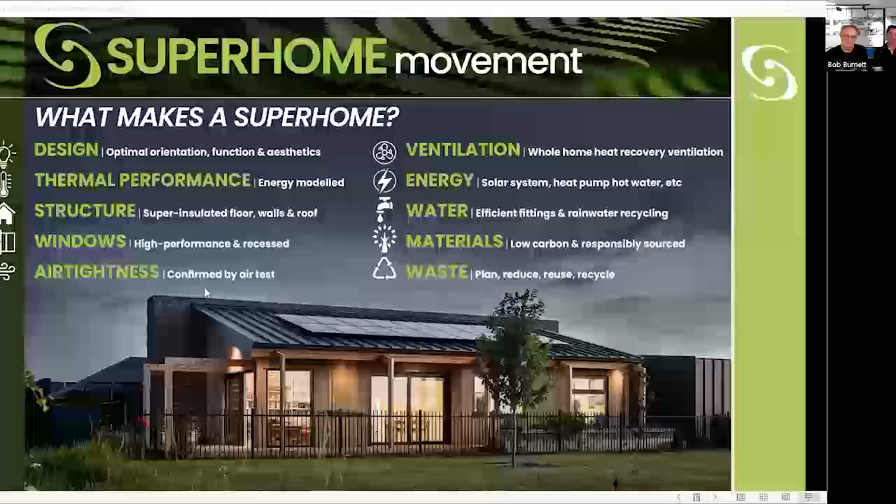Leading off from exactly what you said, I couldn't agree more that early consultant and contractor involvement is absolutely key, particularly to engineer a lot of the steel out. It obviously has its place—sometimes you need portal frames or a beam—but keeping it within the thermal envelope to reduce cold bridging as much as possible, and that's where those early meetings really help.

And just designing with as much timber as possible to reduce that thermal bridging as well. As a lot of engineers and even architects would know now, ProLam portal frames are really good. Your typical living, dining, lounge area with big wings, and at the end you typically have glass with no wing walls for bracing—that's always where 9 times out of 10 you'd see structural steel portal frames, but you can do that with timber now.

Really good to work with those guys too, as we've done on a couple of projects. I think too, for this early engagement, we've been utilising it a little bit lately on the more technical jobs where we're using BIM modelling.

So we can basically build it in virtually before we build it in reality, which we've used for offsite design. That helps out, and it can iron out a lot of issues at the front end, which means you don't waste time on site fixing things up.

So almost like doing shop drawings, I guess. Pretty much, yeah. And likewise, we're doing 3D modelling and sharing our IFC files with the architects at that QS stage as well—irons a lot of that out.

So these are our partners on the screen at the moment in the Superhome movement, and there's I think 3 or 4 engineers, structural engineers, who are Superhome participants. There's probably about 20 or so builders, and probably about the same number of designers.

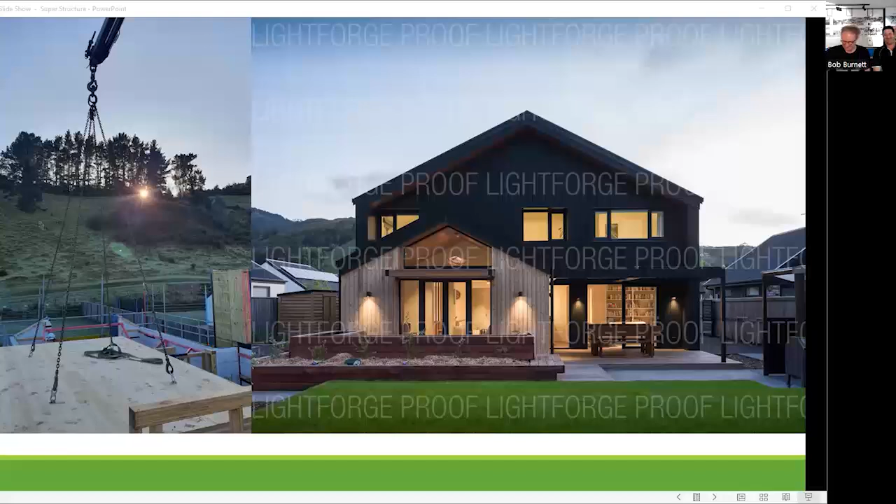So basically you can get away with a floor that's 160 instead of 300. You get that extra height. And the good thing about that too is the speed of it going down, so we weren't cutting every joist and laying them down. Of course, you can utilise that with a conventional joist system and make cassettes and lift them in.

But for this case, for that recession plane, we got that mid-floor down in about 3 hours. And then you didn't have to worry about coming back in and having services penetrations through joists and the like, as that was already done. So we had a service cavity underneath to allow for the ventilation in the ceiling space.

So this project here is a really good example of extensive use of, or minimal, steel. I think there's only one piece of steel in here, if you can see my mouse, it's just this window. And all of these large overhang roofs, and there's a cantilever at the other end of this building, it's all done with timber and sort of box beams with plywood on two sides.

There's the entrance there, so the top floor cantilevers over the bottom floor and creates a bit of a sheltered entranceway. Dan made the Ecopanels for this and installed them, and there was a different builder that did the rest of the job. But we'll talk about Ecopanels in a minute.

But this drawing here just shows how we incorporated the steel so that it's within the thermal envelope, within the airtight thermal envelope. So if you do need steel, it's pretty much essential to not put it in the structural part of the wall that we want to be airtight and insulated. So what would normally be the services cavity, a 45mm cavity, we just thickened that up to 90mm on this one wall, and that's where the structural steel was in that wall.

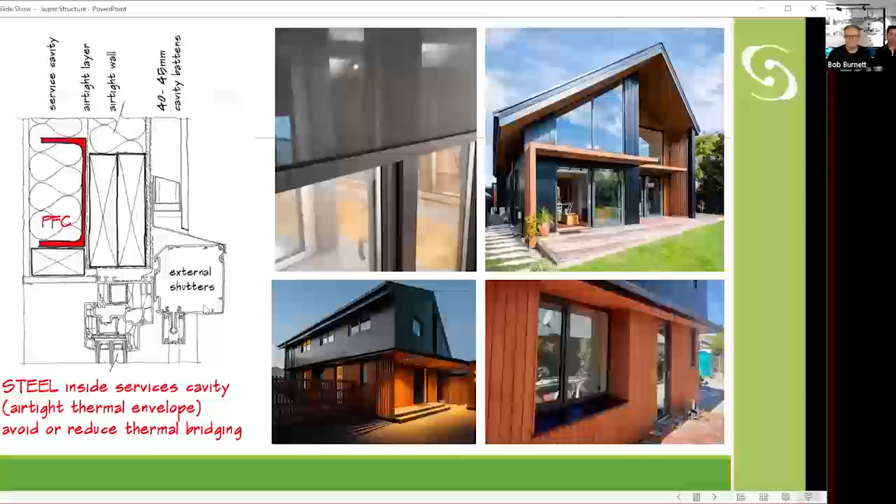But yeah, there's always a way to eliminate the thermal bridging, and it just takes thought, and the desire to do better. Like what we were talking about before, just understanding why we need to do this, and good collaboration and teamwork between all parties as well.

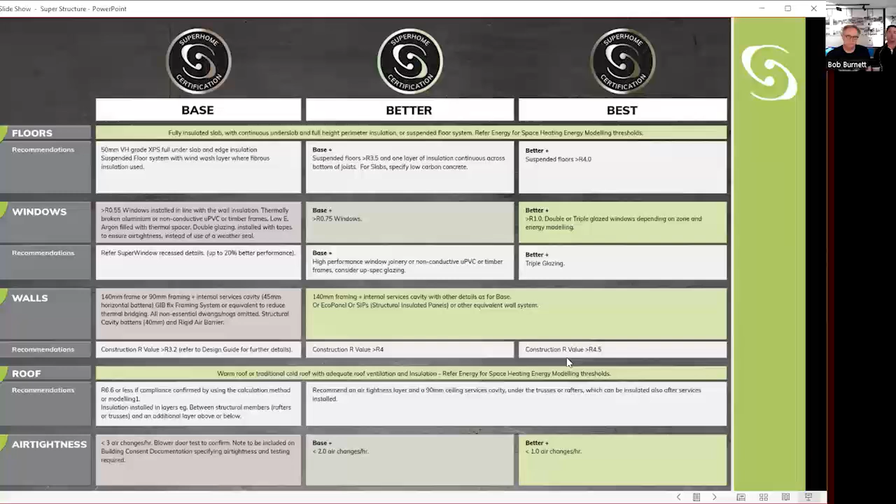So base, better, best. Maybe we need a base, better, best for structural, a superstructure. Do you want to have a think about that for us, Steve?

So you start with steel and work your way up, or maybe it relates to what we were talking about before, or 100% there and then working your way up. Yeah, and how you can achieve that.

I've worked with a lot of different engineers, and some engineers prefer steel, some prefer timber, some prefer concrete. We're definitely trying to reduce the steel both from the thermal bridging point of view, but also from the embodied carbon point of view as well.

So we're doing a project up in Kitchener's Knoll, which is in Redmund Spur, which is exactly that. It's a client system. So they've come up with a system where it's got a plywood shuttering on the inside, concrete, and then EPS on the outside, which all ties in together.

And we've poured these in situ, and so it's just got about 150 mils of insulation on the outside, which then incorporates battens within the system to be able to hold the form in place while it's being poured, but then attach the cladding to.

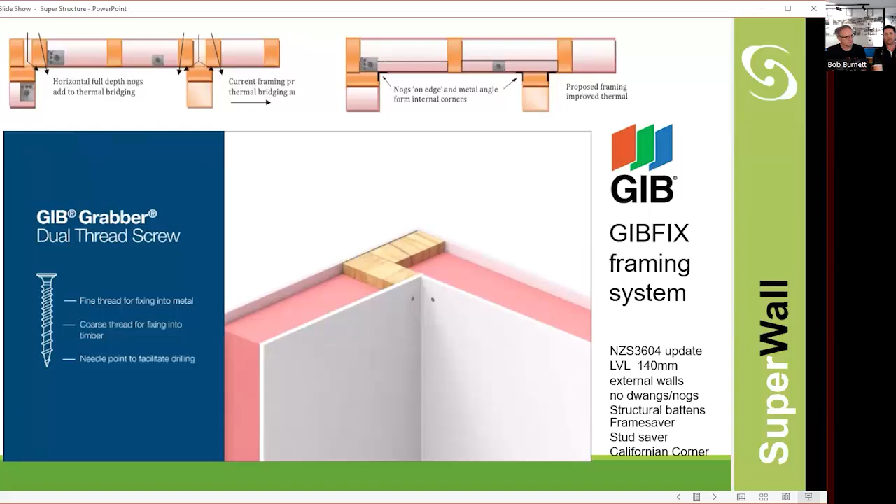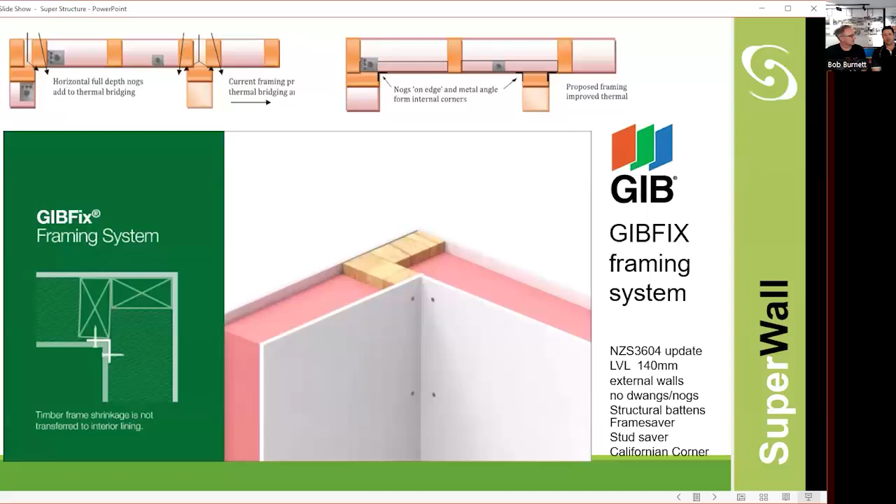And I thought, well, if there's less timber and more insulation, and the insulation's cheaper than timber, then why aren't all houses built this way? We've just carried on doing it the old way. I guess one of the most used sayings around is it's how we've always done it, so therefore it should be right, which is not the case. You should be able to adapt and move and just do things better each time.

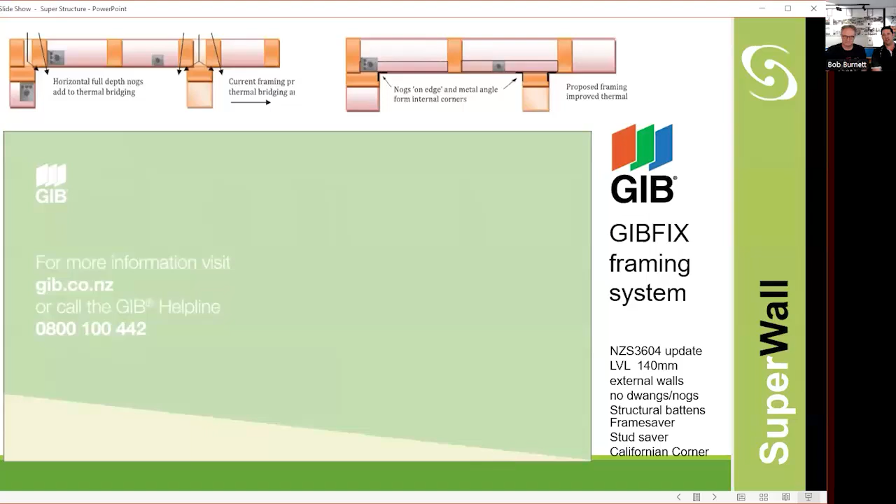Every house that we build, we're always trying to find a little bit extra where we can do things better, which makes it more efficient to build, makes it less costly for the client, as well as just more efficient thermally.

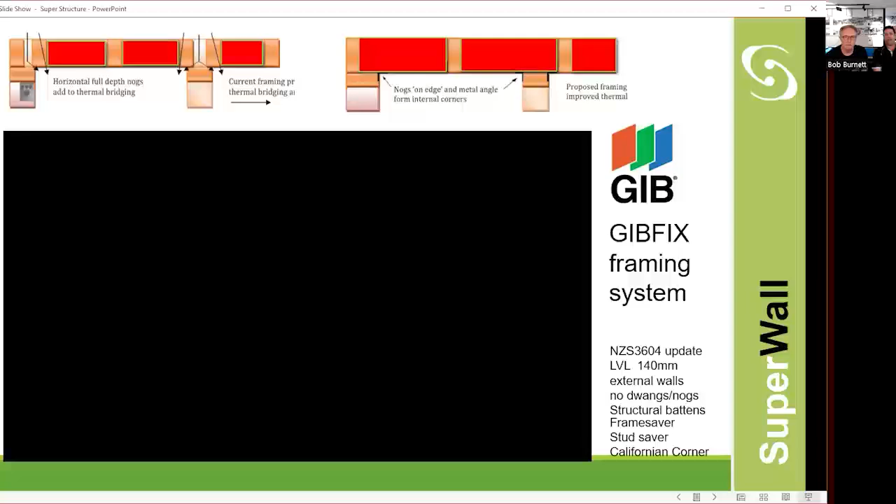So the other thing is just leaving the dwangs out, or nogs, or if you do need dwangs, put them on the edge so the insulation can be continuous past them. But then Ecopanel, Dan, we have another layer of insulation anyway with this.

Yeah, well also on that GIB, that previous slide with the GIBFIX system, it wasn't showing the service cavity, which you can see in that center photo there. So basically, the panels come to site fully formed, from external cavity battens into internal service cavity, so that includes the RAB, airtight layers, insulation, all in one piece. The largest panel we've done, I think, is about 12 meters long by 2.7 stud.

Depending on site access and client's budget, and how big the panels can be with freight, it's pretty easy to do. The good thing is the speed at which they can go up, which reduces your overheads with P&Gs and labour on site. It's all done in a factory.

If you're thinking about building on site, like a 2-storey house on a hill, you're taking one piece of ply up, nailing it on, cutting it, doing it like that. It's really repetitive, takes quite a long time. We've had jobs where we got weather tight on a hill in 5 days using panelisation. You see framing sitting out in the rain for days or weeks.

It then just deteriorates, but it never gets wet because it's wrapped when it's delivered. Even in renovations, we're achieving this same sort of build up with a renovation that Dan and I are currently working on. We're putting ply - we've removed the existing linings, put ply on the inside, and then put an internal services cavity into an existing building.

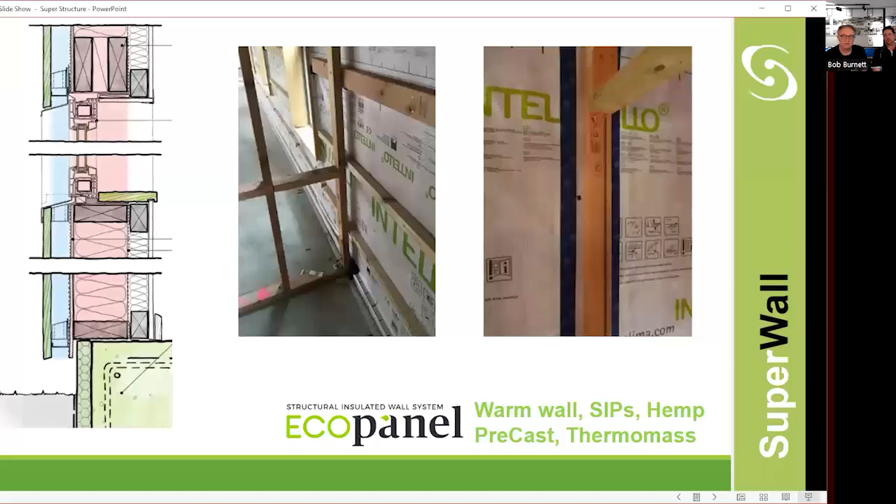This old chestnut, this old favourite - talking about the building envelope, worth mentioning. We should stop putting our windows where the building code tells us, on the outside of the cladding. We've been banging on about this for a while now, and just recently even the good old aluminium companies have come out with some recessed window details.

I guess the windows are still probably not going to be that airtight, not as good as, say, PVC or European style windows, but at least they're trying. At least they've brought out a detail. It's good to see them taking a step in the right direction.

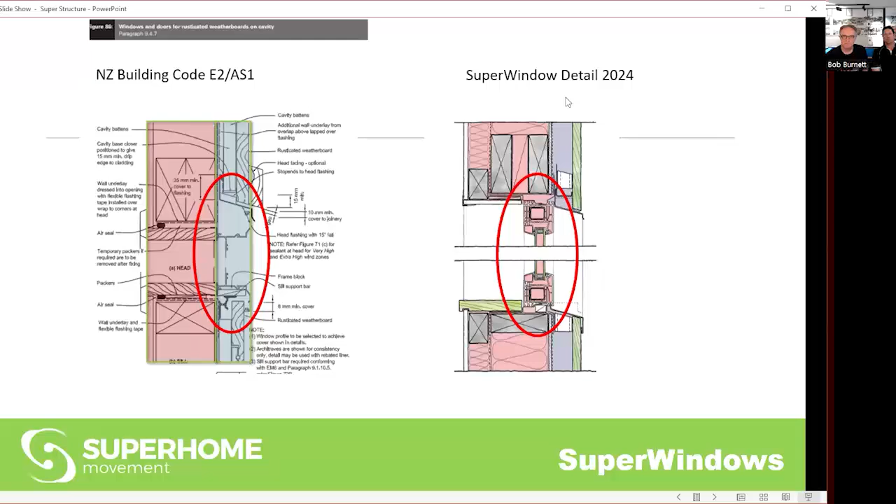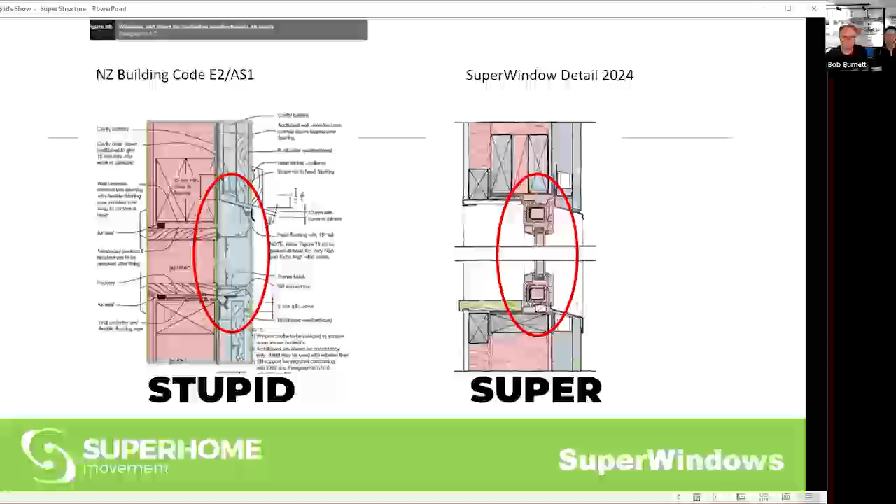We won't dwell on this because we've covered it several times in the past - super versus stupid. So many things that we do that are stupid, just because that's how we've always done it.

Anyone who tries to tell me otherwise, I'd sort of laugh it off, because it just needs to be done. There's always a few non-believers, naysayers. We did a couple of talks at some conferences and had a bit of a heckler saying you don't need to do it - it was like, well, there's the photo, there's the evidence why you do.

Similarly, if you take a photo of a wall where you've got the extra services cavity, you'll see that it's eliminating the bridge where the studs are, because the only point where you've got a thermal bridge is where those two timbers cross.

If we go back to talking about walls, and you were making a decision to say yes, I want a thicker wall, and you're debating whether you go a 140 stud - obviously with no dwangs if you can avoid it, we can avoid it - versus a 90 with the services cavity.

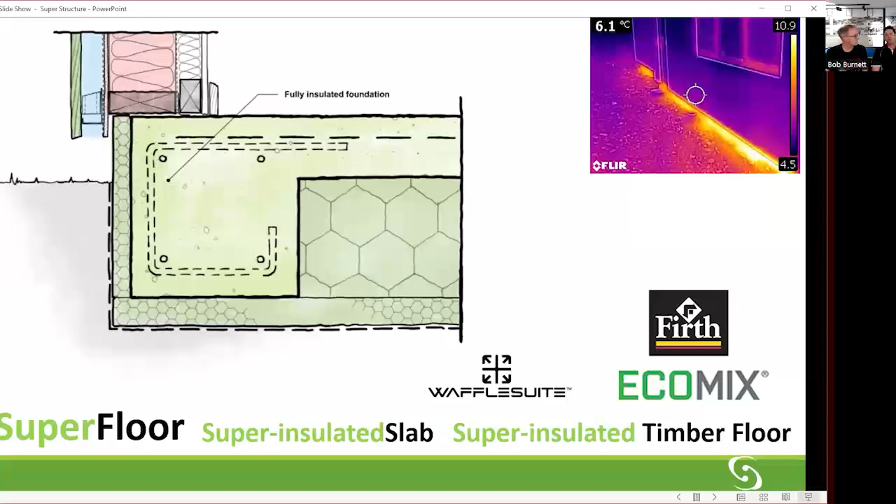You'll actually get better performance out of the 90 plus the service cavity. You get the same insulation value, but because you're only having a 45 by 45 area where there's potential thermal bridging, versus a stud going all the way up. And that's only talking about the external walls. I think it adds surprisingly little extra cost just to put some horizontal battens and an extra layer on the external walls. There's a slide coming up of a project we're doing - well, there you go, there it is.

When people started talking about the rollback on H1 insulation levels, I did some figures around the cost benefits of doing the extra layer of insulation, which was only about $2,500 over this house - there's about 167 squares on the floor. Also with the walls, by the time you take away credits for the triple studs and the extra row of dwangs, I think the uplift in cost to do the service cavity plus the insulation on that house was about $1,200.

If you were doing a service cavity plus insulation with a 6x2 wall - the previous one was a 90 mil wall - but the 140 stud was only $550, because obviously you're still putting the service cavity insulation in regardless, but the cost per linear meter for the 6x2 framing is more than the 4x2, hence why it's a lesser cost.

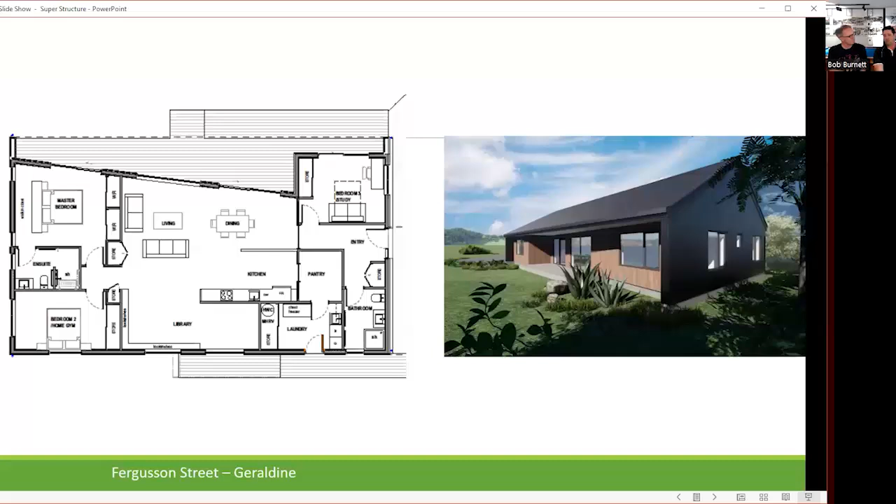So you'd save that in your power bill, wouldn't you? Yeah, in the first year, probably.

So roofs - another silly thing in the building code is this idea of having 500 millimeters around the edge of the roof where you can have the old standard, half the insulation. Completely bonkers. The heat will go to the weakest link, and the external perimeter wall there's probably going to be windows there too. That's where the most heat loss is going to be, and you definitely don't want to reduce the insulation at that point in the roof. So there are ways around that.

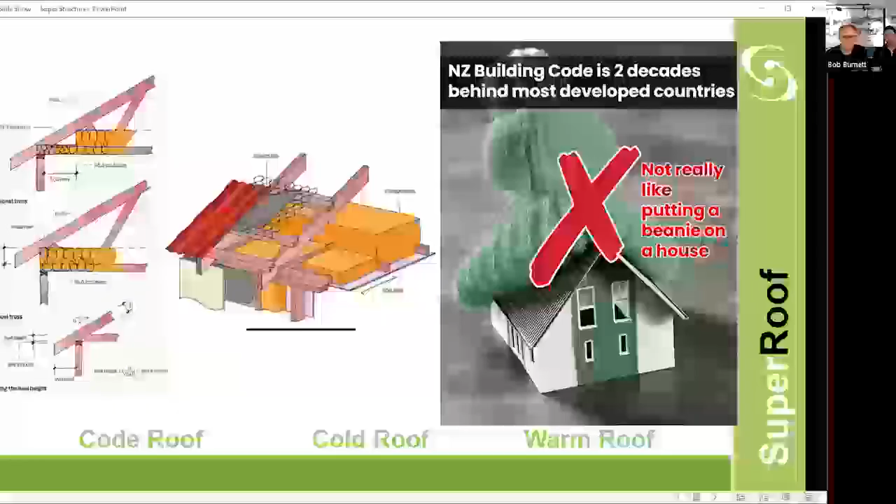Maybe I've missed a slide - oh, here we go, I'll jump forward. So you can increase the height of the truss heel. Commonly we're adding an extra cavity, kind of like your wall service cavity, but on the ceiling. We're putting a 90 mil cavity in the ceiling, so our ventilation ducts can go across the bottom chord of the truss, and if required, you can fill that space with insulation as well.

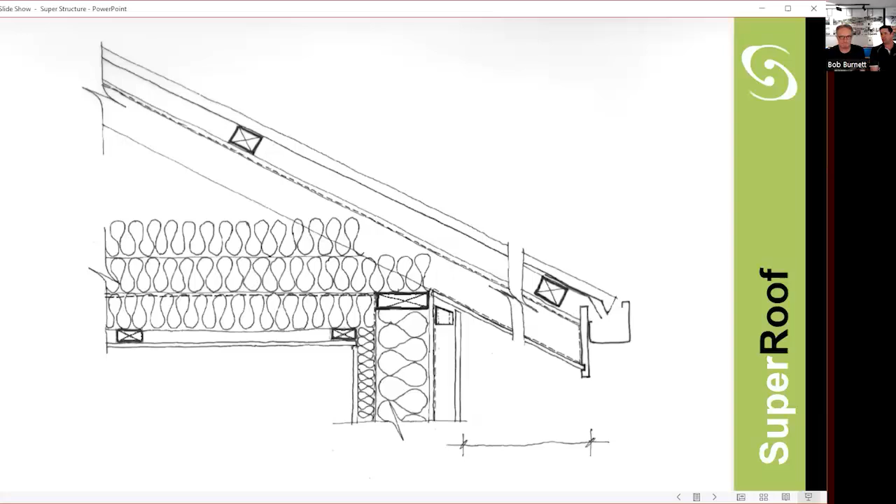Which is the same if you do a skillion roof as well. The good thing about lifting up the heel to make that insulation layer continuous right to the outside plate is it'll give you a larger overhang as well, which will help with shading - so it's a double benefit.

It's a common problem with Kiwi homes - people don't think about overheating and climate change. We're living in a warming climate, and it's only going to get worse, so we've got to design for it. I think when there was this furore about winding back H1 changes, one of the comments was that adding insulation was going to make houses too hot. The thing that makes houses too hot is faulty design, not more insulation - actually more insulation is going to make it cooler.

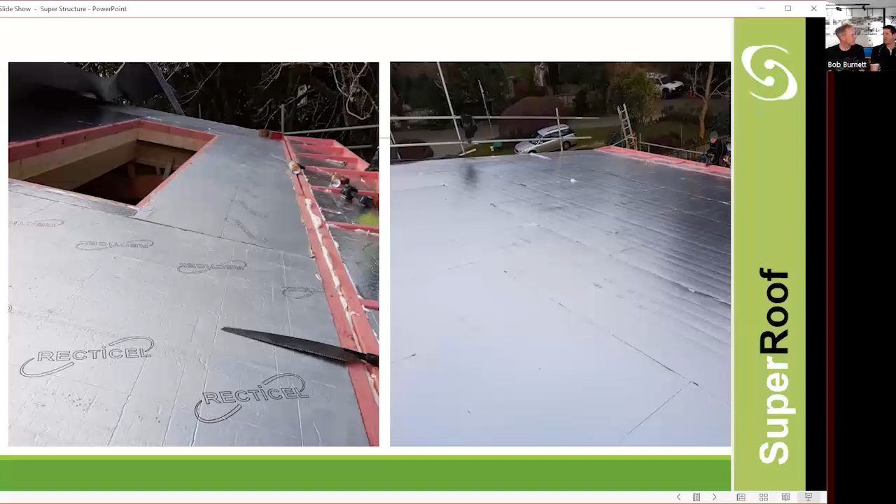Insulation works both ways. If you think of it like a chilly bin, it keeps whatever's in and whatever's out. So if the heat's in there, it's going to stop it from escaping because the insulation is doing what it's supposed to. Now you've got to stop that heat from getting in there, which comes down to design. So it's just disappointing - even people in positions of authority, who should have people advising them about these things, just don't know what we're talking about.

I think generally New Zealand building, the New Zealand public, and the industry to a large degree - often people don't know what they don't know, and we think we know how to build, but it's a bit more complex than people give it credit for. So just getting the right people involved and trusting the experts is really important. It's okay to say you don't know - we don't claim to know everything about it, so we're still learning every day. There's always a better way of doing it.

There are loads of people around to seek advice from, to get the experience of people who have already been there and done it. That's the philosophy with the Superhome movement and its ethos - we're sharing all our ideas because we're learning every day. By the time we pass on information, we've actually moved on and we're doing something new. Our big thing we're up to our eyeballs in at the moment is embodied carbon and building New Zealand's first zero carbon superhome.

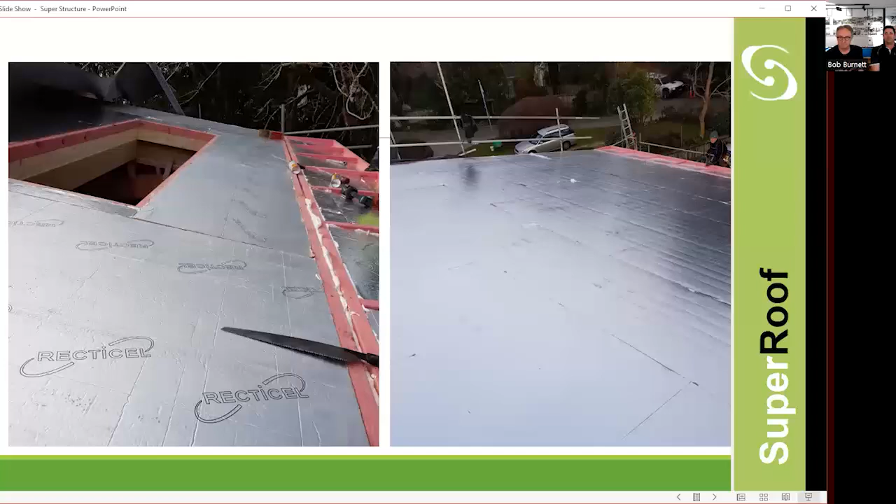So, yeah, that was your... so this house here - why did I include this? Oh yeah, so this was the one we did a Quakestar house check on, and this was 5 stars.

The client was really interested in that, and they had to move out of their house - they were actually moving back from Wellington, earthquake refugees. They left Christchurch after the earthquakes and moved to Wellington, an even more earthquake prone place. Then they came back to Christchurch and wanted a house that was going to be their forever home, which is a common request from Superhome clients. They morbidly say they want to be carried out in a box, and this will be their last home.

So they wanted it to be Quakestar, LifeMark, 10-star, passive house - all of those good things.

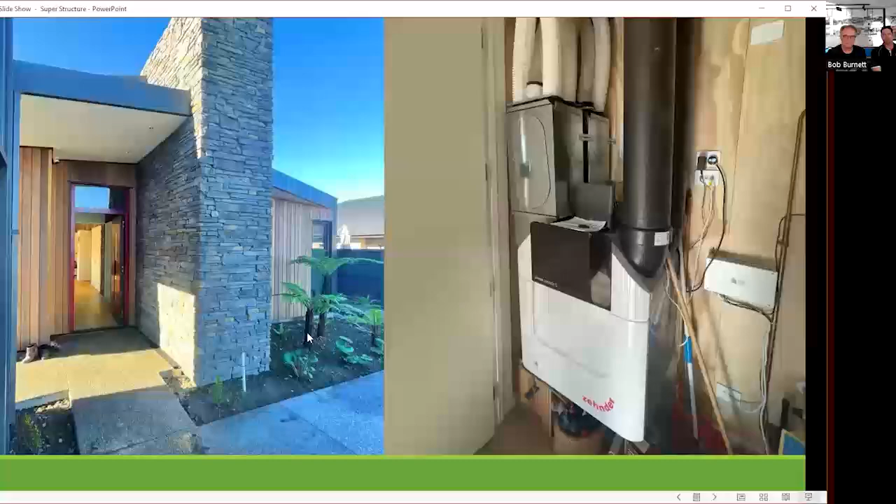Yeah, and this was a really good example of what we were talking about with early engagement. The builder for this project actually built a model of the wall that went through the middle - if we go back to the plan, this wall through the middle housed a lot of the ductwork and the services, so it was very functional, not just for the look.

It's an interesting thing about that wall: it looks like the stone's going right through, which people think creates a thermal bridge, but it's not. It just looks like it. Some people ask if it's a heat sink because it has thermal mass, but probably not much, because it's just a timber frame wall with a thin veneer.

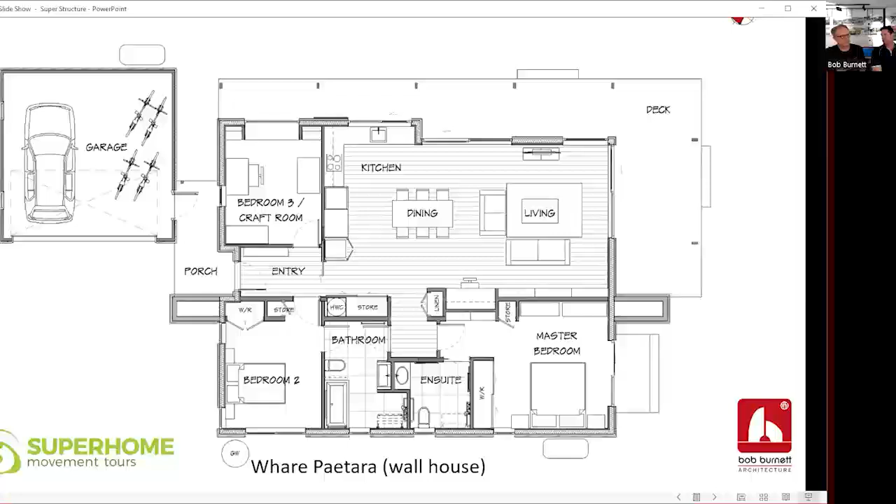And just incidentally, that veneer - if I go back to that picture, or look at another picture - it's on the inside as well, just to create the illusion that it's a solid wall. But that veneer is so much more resilient in an earthquake.

After the Canterbury earthquakes, a lot of the traditional schist, the 140 stone, was on the ground, because basically the only thing holding that together was gravity, whereas this is actually glued on. The homes that used this veneer product were completely undamaged in the earthquakes. So it's just another good reason.

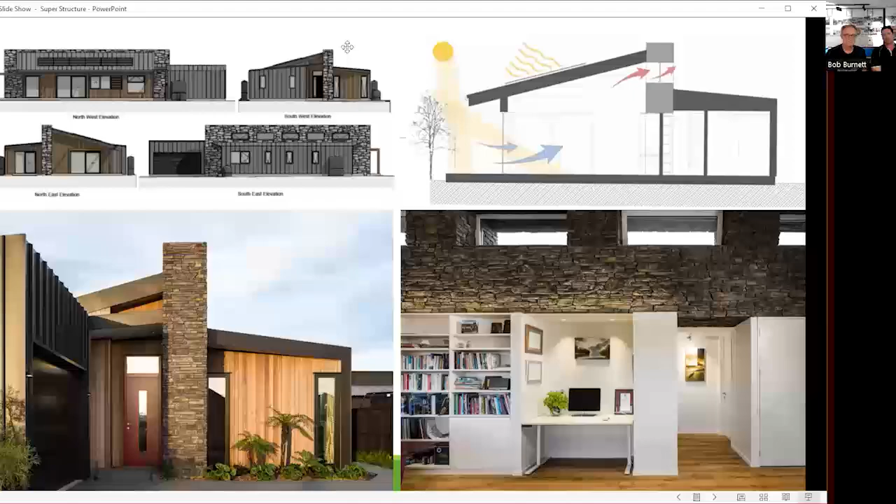Sounds like I'm a salesman for stone.

Anyway, this house is zero energy. These solar panels produce more power than the house actually needs over the course of the year, and that includes running their electric vehicle. So free power for the house and free running of their car, which is pretty amazing.

So how are we going for time? Oh yeah, so this was...

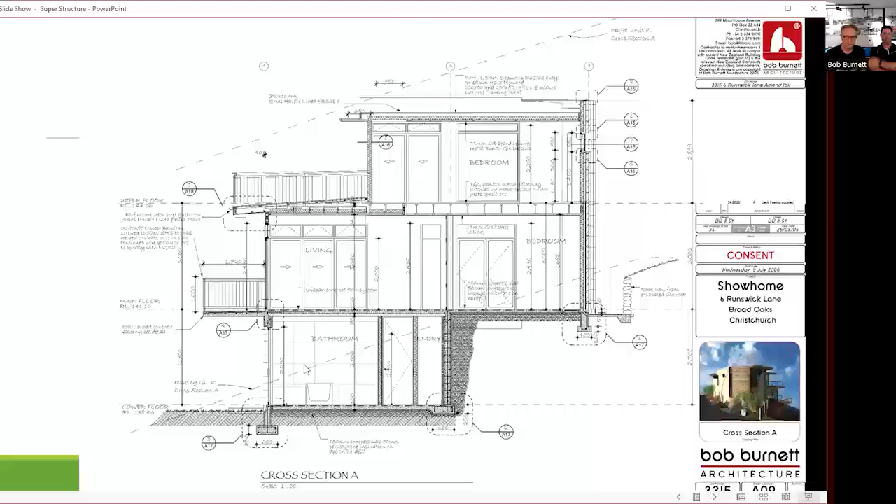And then we added a warm roof. The roof actually wasn't damaged, but we wanted the extra insulation, so we added that and added solar panels. That's the PIR we're talking about, that the membrane's glued to, and then timber is inserted for the fixing of the solar panels.

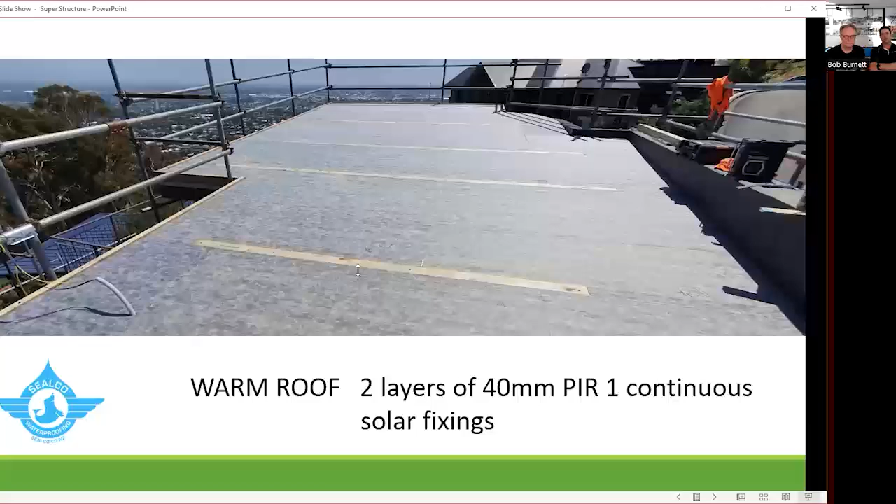So there are two layers of insulation: one is continuous, and then the timber sits on top of one layer of insulation. If you talk nicely to the structural engineers, they'll usually let you have thermal bridge-free construction, whether it's concrete or a warm roof, whatever it is.

The other thing we did on that job is put external insulation on concrete block, which is another good renovation tip. A lot of the time concrete block walls have been built inside out, with a thin layer of insulation, strapping and lining - battens and plasterboard on the inside - which is really inside out. We want the insulation on the outside. So if you can fix insulation to the outside and then put a plaster finish over it, that's a really good way of dealing with a poorly performing concrete block wall or even a concrete wall.